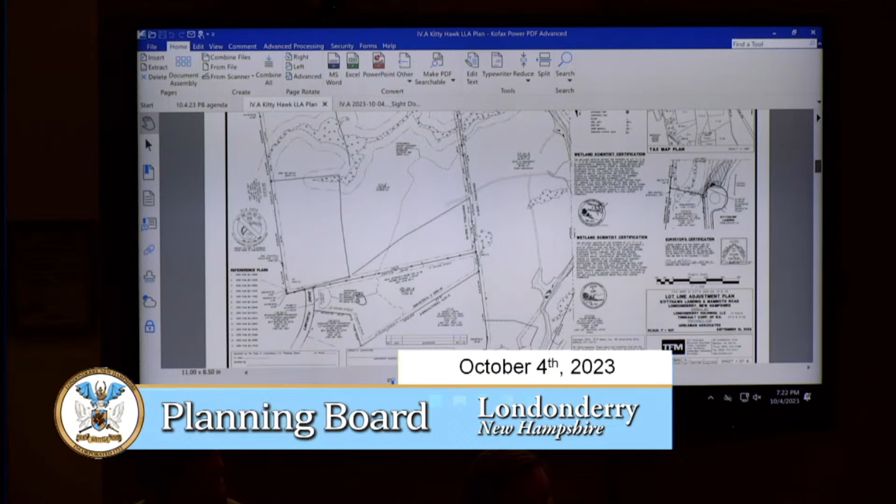So the parcel that the comment is relating to is this parcel right here. This is a result of a subdivision, you might recall, Mr. Chairman, the Hilltop subdivision, which was approved back in 1998. It's a vague memory, but I recall there was considerable discussion about it at that time.

I'll try to be as brief as possible, but essentially that subdivision was two-phased. Only Phase 1 was approved. Phase 2 included essentially dividing up and creating this parcel. Phase 2 did not actually occur from a legal standpoint. The town does not recognize this as it's drawn on the lot line adjustment plan as an actual parcel. The town recognizes this as the legal parcel.

So that, in short, is the comment and concern, that this is the parcel that should be shown on the lot line adjustment plan before you, not this layout as shown. This isn't a recognized lot, is essentially what the comment is saying, and that is true. It is not a recognized lot in this form as it is drawn on this lot line adjustment plan. So the expectation is that be corrected and fixed before final approval of this plan.

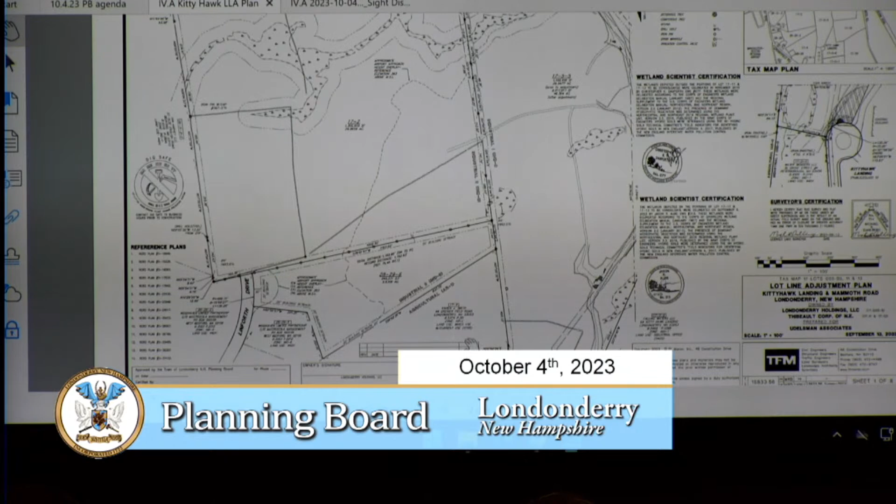Would it reflect what is in our GIS system? Correct, this right here. That right there, okay.

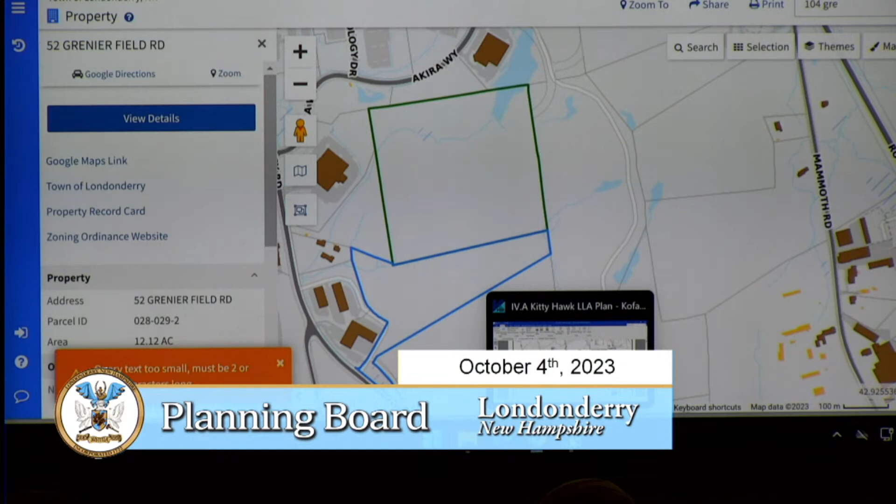If I can offer, Mr. Chairman, it's kind of an oddity of timing, in that there was also supposed to be another application before you this evening, which was the subdivision of that lot, whereby the applicant would be acquiring a portion, the portion identified on our plan. We have since withdrawn that application because they're now purchasing the lot in its entirety. So we had an unfortunate timing event of one application pending, another application made, and then that prior application was pulled. So this plan unfortunately reflects dated information.

So we acknowledge everything that's been said, and we'll update the plan accordingly. I just wanted to make mention that it was somewhat a matter of timing, where we had intended to subdivide that lot when this application was submitted, but no longer had to, as we're now purchasing that lot in its entirety. So our apologies for that confusion. Okay, so then the correction will be made.

Yes, sir. Lastly, Mr. Chairman, planning staff does support the waiver as it relates to the delineation of wetlands on the entirety of the site. We are supportive of waiving that requirement. And you support waivers 1 through 8? Was it waived for acceptance purposes only? I believe the only one they asked for a waiver on was number 8.

Once we get into what to do with the waivers, whether to grant them or not, the board will need to act. If you're choosing to move forward, you'll need to act on two waivers, specific to sight distance and specific to the wetland delineation. You'll need to provide your justification if you're choosing to act on those this evening.

So can you highlight the incorrect lots - so they are just abutters to this and don't have any actual effect to what you're doing? They don't have a bearing on the actual proposal. It's just an improper drawing - the reference shown is out of date. Correct. If you guys were to sign that plan, that would create a non-conforming lot. Correct. But obviously, as a condition of approval, they'd have to adjust it to be appropriate. Yep.

And the purpose of this is to get the required number of acreage to go in for the master site plan, master plan, PUD, whatever the appropriate terminology is. And that remaining lot, John, your concern is that it's creating a non-conforming lot?

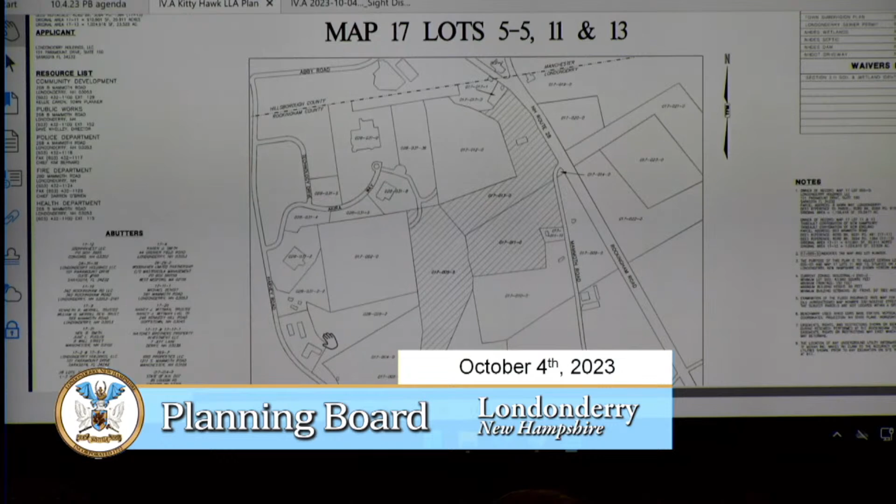No, again, my concern is making sure they have sight distance onto Mammoth Road. Looks like they got a lot of frontage on Mammoth Road there.

So show that you have the sight distance. So sight distance from 1713? No, what is it, 1711. Oh, 1713 has got an existing.

Correct. So that's an existing lot, so why would sight distance be a concern there? I know we're creating a new lot, but it's existing conditions, right? Now's the time to check it, though, Lynn. But it is existing conditions.

Yeah, what's the required sight distance, do you know? Well, again, I believe this is AR1. 250 feet of sight distance. So if it wasn't changed, it'd be a lot of record and you could develop it. But you're creating a new lot because you're moving the lot line back, and now you've got to check whether or not it's got proper sight distance. Correct, it's a safety thing.

Am I reading this right? So what did you say, 250 feet? 250? Am I reading that right, that if I measure it, there's about almost 800 feet of lot line there? So you're looking at two-dimensional, not three-dimensional, okay.

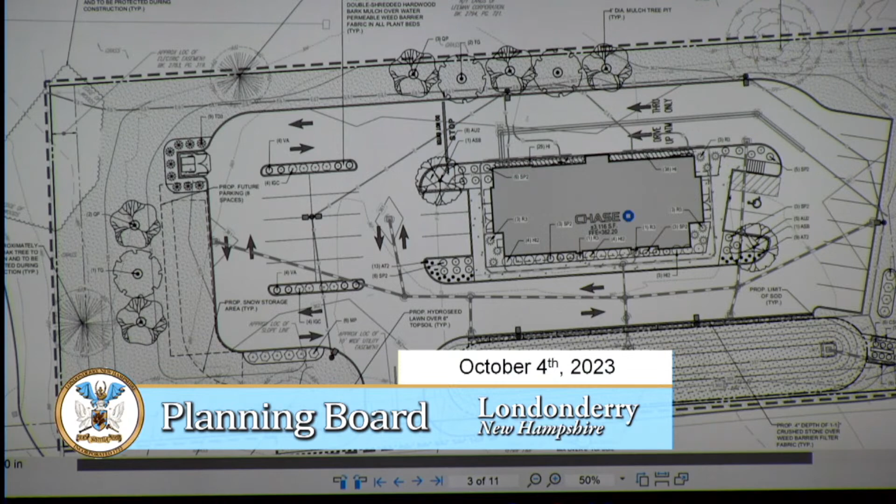That's kind of a high-level overview of the site itself. I did want to also show you the building. If you can flip to the next one, Kelly. Yep, so this is the building here.

It's a mixture of red brick and some clapboard siding. Again, we did meet with the Heritage Commission and address some of their comments and concerns. I think initially it might have had a gray brick, but after some back and forth, we went with the red. And the project architect, Kevin, is sitting next to me here in case there are questions on this.

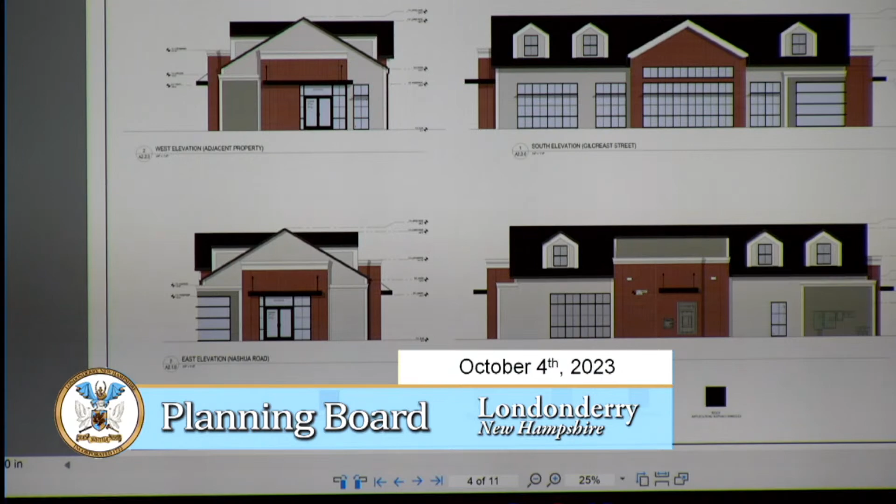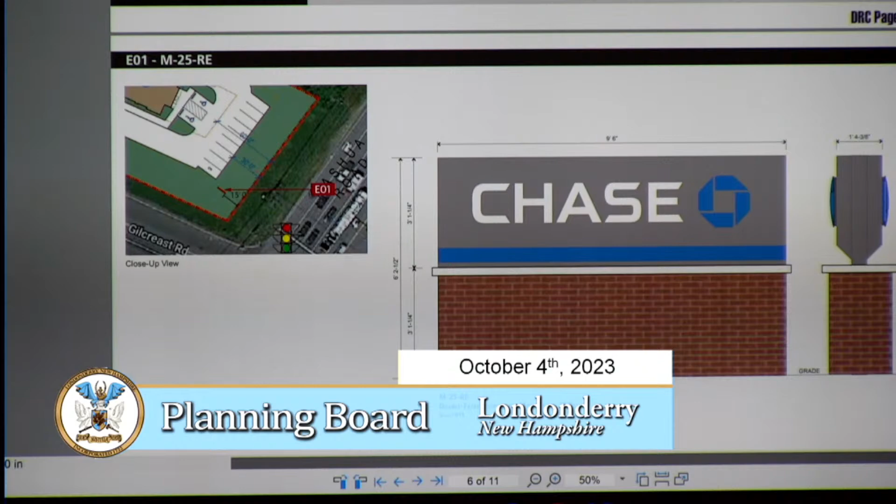And then there's just a couple building signs that are also being proposed. One facing Gilcreast and another facing Nashua Road, just an internally illuminated wall sign. And then there's another one facing Gilcreast. That's it for wall signage. Other than that, there's just your typical directional signage around the property.

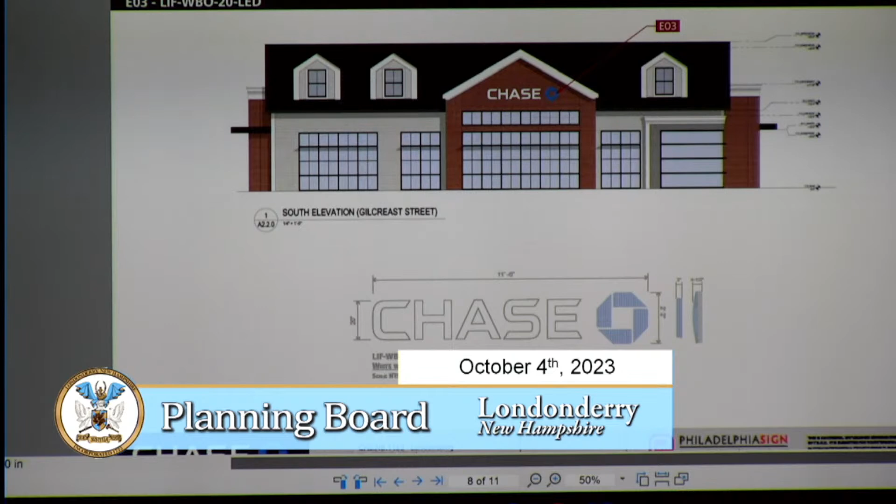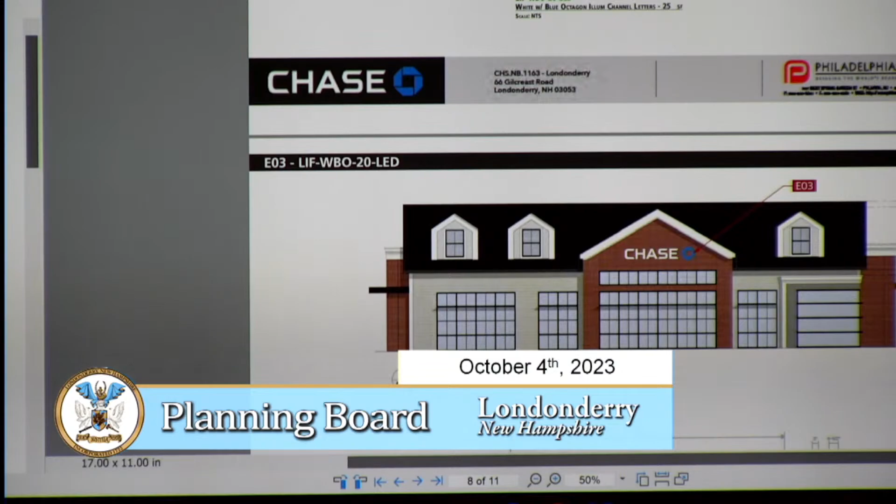And that's kind of a high-level overview. I know we worked through some of the design review comments. I think there's just a couple little outstanding comments that we did just receive a letter on yesterday, but very minor technical stuff that we're happy to address. Other than that, that's kind of it. I'd be happy to answer any questions.

Okay, thank you. Go to staff. I'll start with John. Randy summarized it pretty well. Bottom line, the existing building goes away, the pavement out there gets tightened up, the detention pond is reconstructed, and the entrance onto Gilcreast Road is narrowed up and more parallel, directly across from the old 50 Nashua Road. So Randy summarized it pretty well.

We do have minor design review items. The applicant should submit for and obtain all project permits, indicate the permit approval numbers in the permit table on sheet C301, and provide copies of all permits for the planning department's files in accordance with the regs. Item 2, we recommend that the applicant provide an insulated sewer pipe construction detail in the plan set for proper construction.

Item 3, we're requesting that they address items relative to the project drainage analysis. Item A, provide an updated and complete stormwater report that incorporates the recently submitted 25-year design velocities of the proposed pipe network based upon the actual flows, which demonstrate the minimum pipe velocities of 2 feet per second is achieved.

Item B, we recommend the applicant incorporate the recently submitted best management practice map in the project O&M and update the maintenance log form to specifically list each BMP in the report, similar to sheet C905, to ensure each one will be inspected as typically requested by the Department of Engineering and Environmental Services. Lastly, update or verify the DRC comments for the project are adequately addressed with the assessing department and the fire department.